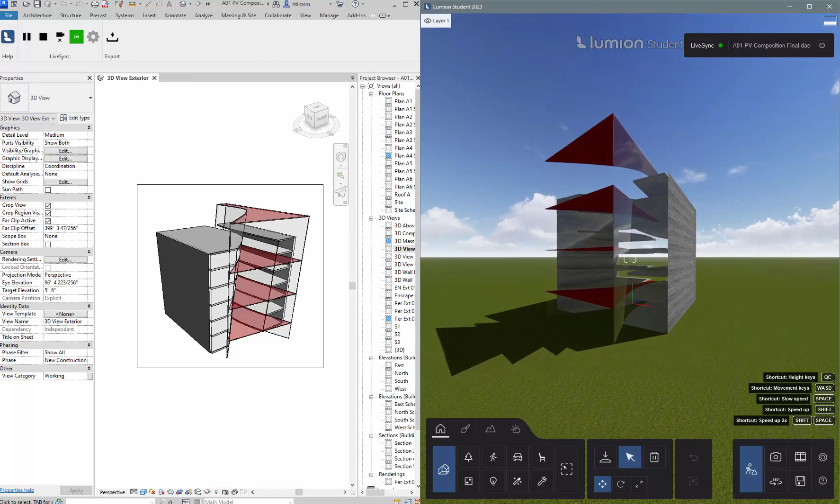If live sync works, great. If not, then you might have to export as a separate file. But if your live sync works, I'm just going to come into Lumion. First thing I'll do is set up the view the way that I want it in Lumion and then save it so I have it to come back to.

I think I want to look at it from this other viewpoint, maybe up from above, and a little bit more from this way. Just kind of getting it into a view that I think I want.

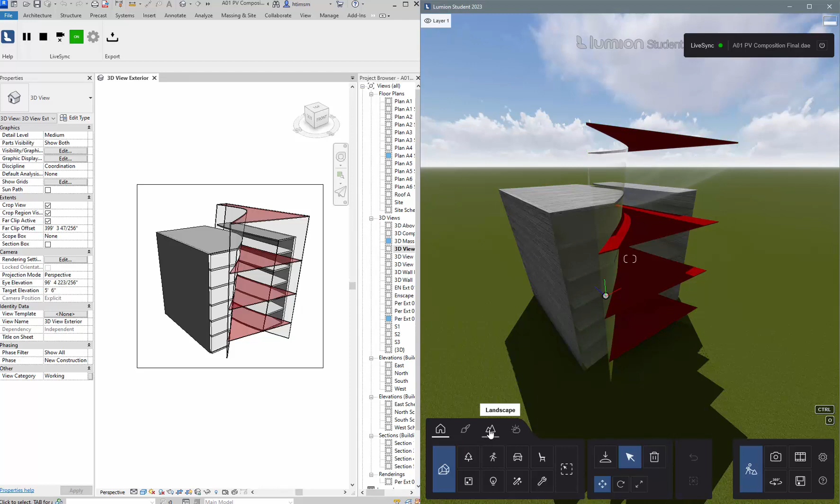Then I'll go to the landscape and pick my landscape and change it to white. Then maybe if I tweak it a little more, I go to my photo and adjust it to get it a little bit more the way I want, and I just go ahead and store that camera.

So I have one. Seems like I want to look at it from a little bit more this way, and maybe a little higher. But again, you could make another camera. Also I'm getting the sky out of there, but we can adjust that later. So I'll set that up and store that camera so I have it.

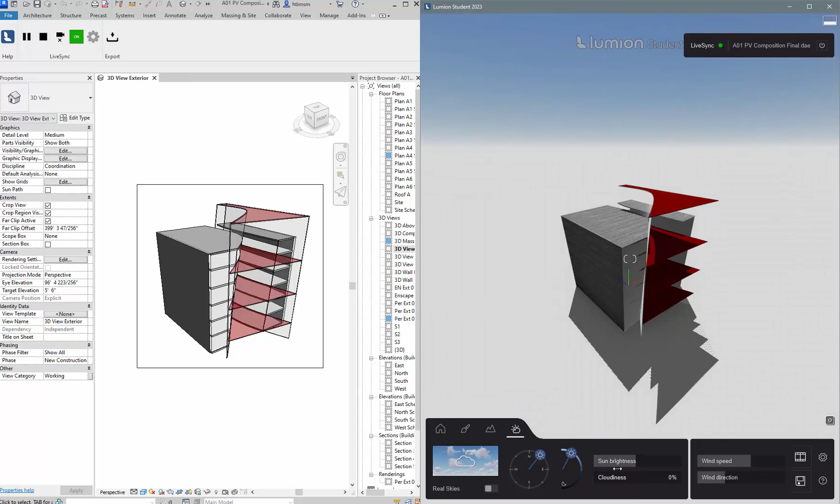Then I can go back to my build and set a few things up. I'm also going to go to the weather here and get rid of the clouds. I'm going to adjust where the sun's coming from, bring it closer in this way and maybe a little lower. Just tweaking things where you think you might want them.

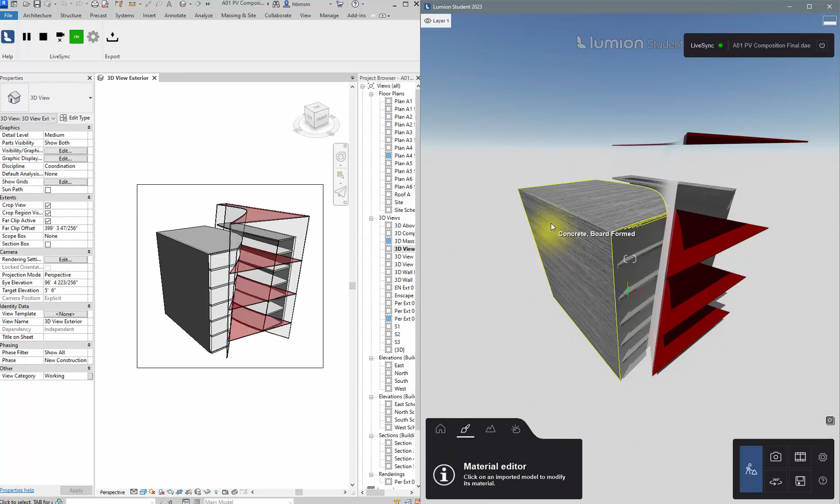Next, let's go in here and play around with the materials. If I come into my materials and pick this board form concrete, I wish it would let me move it around, but it's a little too much in my face. So if you go to the board form concrete, pick it, and go to settings, you can pull the texture back some and it will start to adjust that.

You can also obviously change the color, and it will change the color if you wanted it a little red. But I'll pull that texture back a little bit. There are a few things you can't do, like UV coordinates are not available, but the other properties are. So if you wanted to adjust those, maybe I want it darker. Ooh, that's really dark. Let's put it back to white and adjust that a little bit.

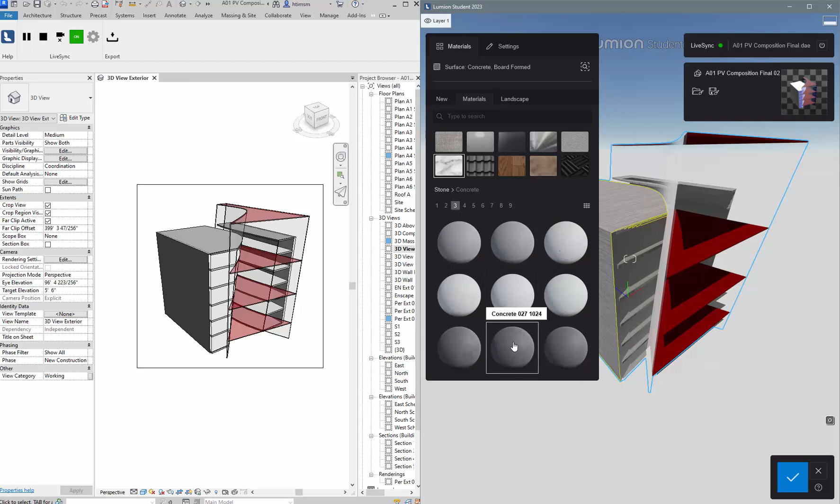If you decide you want a whole other material, you can come in and go to the materials. I'll pick this stone and go to concrete here. Let's scroll down, maybe I've got one that has some — I'll pick this one. It looks like it's got concrete plates.

When you use one from Lumion, you can go in and double click, or go to the settings when it's selected, and you have the same sort of thing. This one's really dark, so if I change that value to white and pull that texture way back, it'll adjust it. So I would suggest doing that.

You also get things like UV coordinates. So if I change the size of this, it'll start to change the size of those blocks — they get bigger. And you can twist them and do all sorts of things. But I would keep it pretty simple.

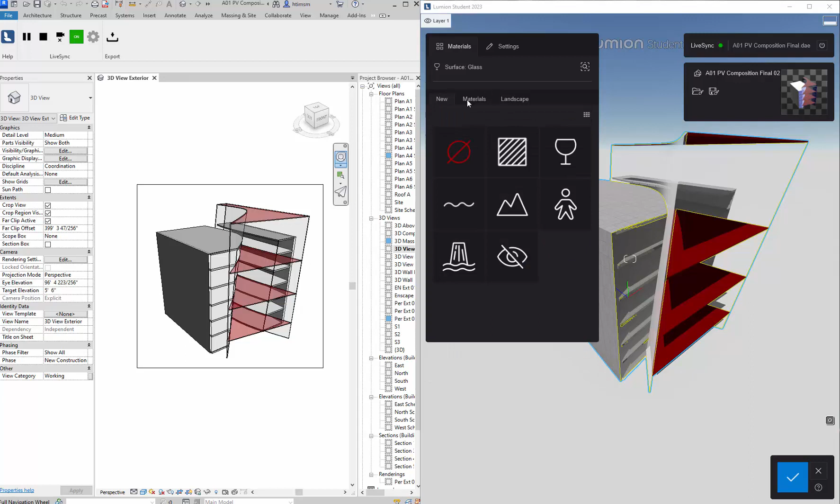If you need to select something like this glass, go to materials — let's go to surface glass and go to materials. You can set a glass material to that. So if I go to materials and go back, just go to new, and you can come in and pick different things. If I go to glass advanced, it now puts glass advanced on that glass.

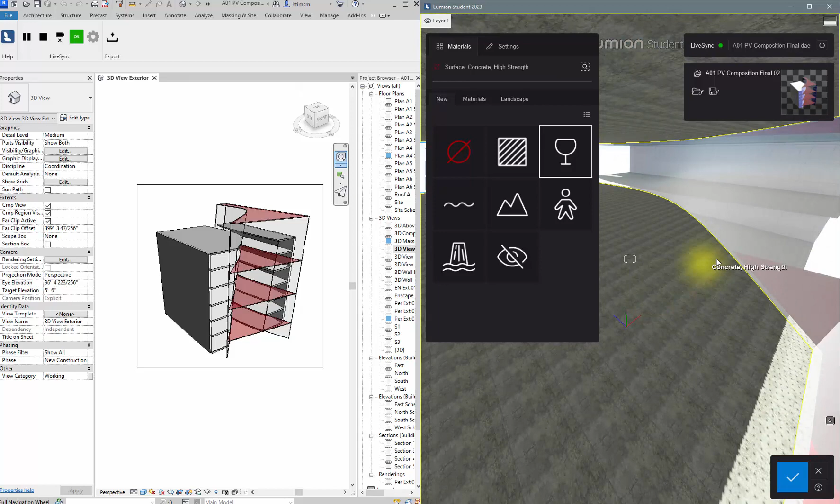The other thing I can do is, if I'm trying to get to this floor here, I have to go past the glass to get to the floor because it's covering it. So I go in and pick this high strength concrete, then go to materials — maybe I'll put polished concrete on it. That one's pretty nice, so I'll just use that.

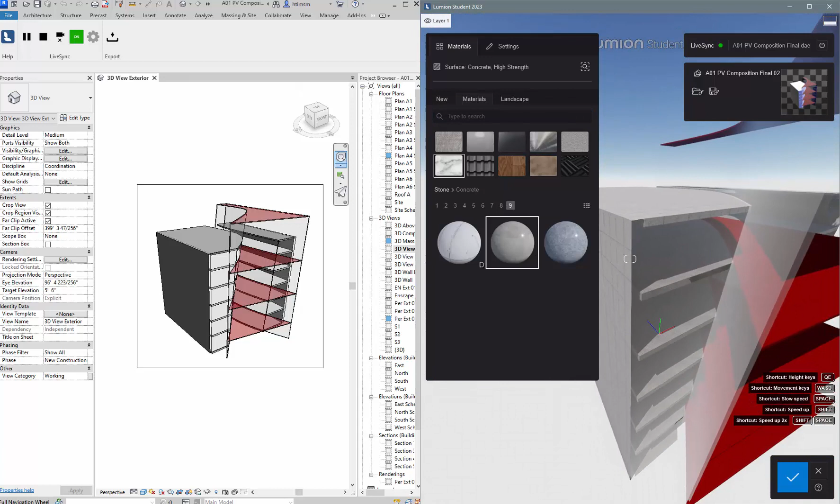These little dots will go away when you render — I think they're just an artifact from the transparency of the glass. But you can come in and set things up the way that you want, so I would suggest doing that. I'll hit check here, and just get to a point where when you go to the photo, you've saved the photo now and can come back and render it from here. So we'll do rendering after this.